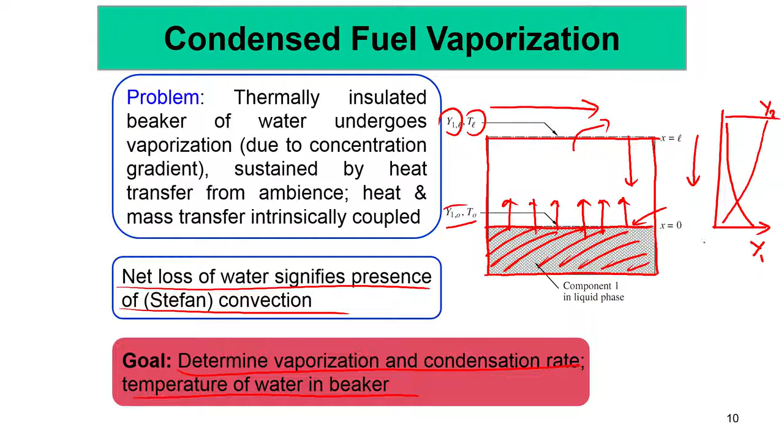Now, we can also apply species conservation, where i equal to 1 can be the water vapor phase, and i equal to 2 can be the air phase. Of course, there is also air here, because if the species profile of Y1 is going down like this, there has to be air, Y2, going the other way, because the sum of Y1 plus Y2 must always be equal to 1.

Okay, so for that, if you consider the species conservation, this is F times dYi/dx minus d/dx of rho D dYi/dx, equal to 0. Of course, F is equal to rho u, because the actual formula is like this: rho u dYi/dx minus d/dx of rho D times dYi/dx equal to 0. So that is the thing.

So instead of rho u we have put F, because that is a constant, and then if we integrate it once, we get this thing: F Yi minus rho D dYi/dx is equal to a constant, and that is equal to Fi. Why Fi? Now that is an interesting thing. For that you have to understand what these two things are, that is why I have written this.

So we have to look into this guy, that is F Yi minus rho D dYi/dx. What is this thing? We can write this F as rho u times Yi minus rho D dYi/dx. Now this guy, rho u Yi, rho times Yi I can write as rho i times u, minus we can write this as Yi by Yi times rho D dYi/dx.

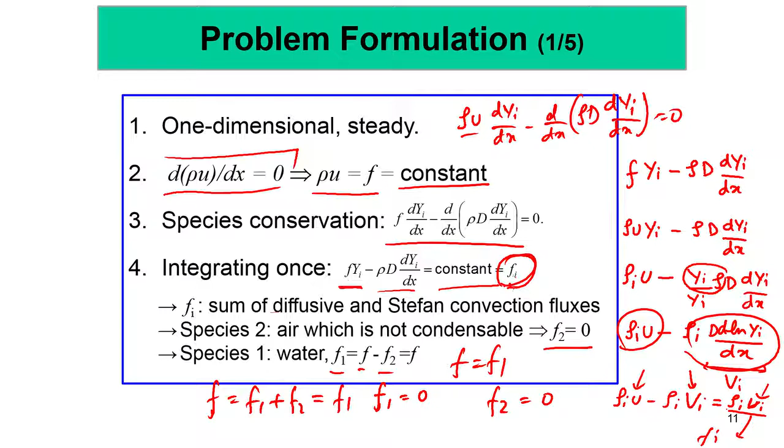So we can replace this F1 with F. Then we get F Y1 minus rho D dY1/dx equal to F1, which is F, so we get essentially F times (Y1 minus 1). We can write this equation as F dx equal to rho D dY1 over (Y1 minus 1), and then we can integrate this.

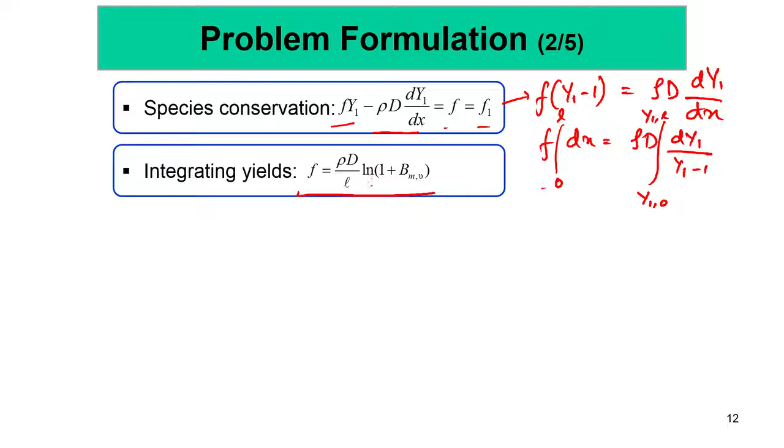We integrate between 0 to L, and Y1 from Y1,0 to Y1,L, and we get F equal to rho D over L times log of 1 plus B_M, where B_M is the mass transfer number, which is this quantity. This mass transfer number is essentially the difference between the species mass fractions at the boundaries, that is Y1,0 and Y1,L.

So, this is the difference between this divided by 1 minus y10. Okay. So, you see that this net mass flux has a logarithmic dependence on this mass transfer number, BMV, which is given by y10 minus y1L divided by 1 minus y10. And of course, you have vaporization when this is positive and condensation when this is negative. And when it is negative, y1L should be greater than y10.

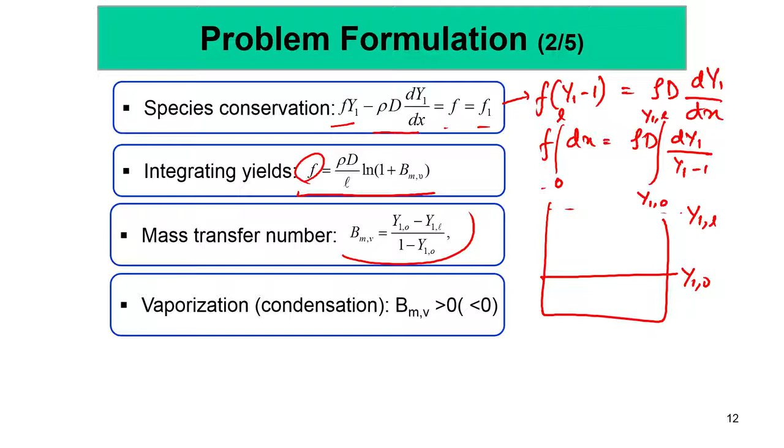So, if the ambient mass fraction of species 1 is greater than the mass fraction of vapor just above the interface, then you have condensation. Okay. And if it is slow vaporization, if BMV is much less than 1, you can approximate the logarithm to be linear and you get rho D by L times BMV. But when this becomes large, you have a logarithmic dependence which tells you that f essentially slows down with increase in BMV and is not directly proportional to BMV. The proportionality only holds when this is very small.

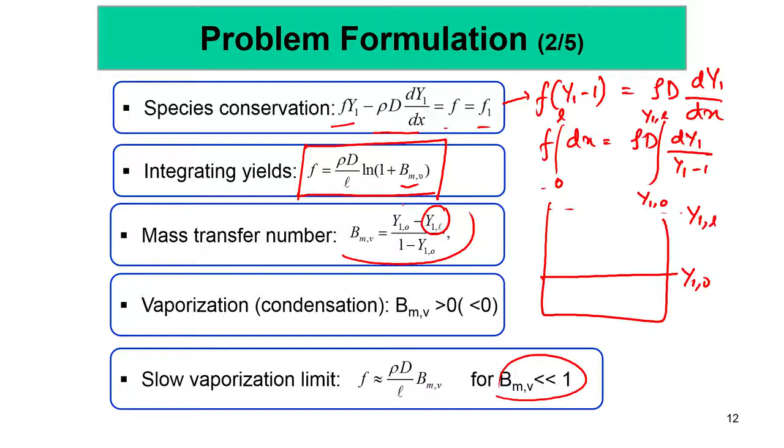Okay. Now, you might think that the problem is solved, but it is not, because in this vaporization mass flux f, we do not know BMV, because we do not know what is our y10 essentially. So, the problem is incomplete, because with only species conservation, the vapor concentration at the surface, that is y10, is not known.

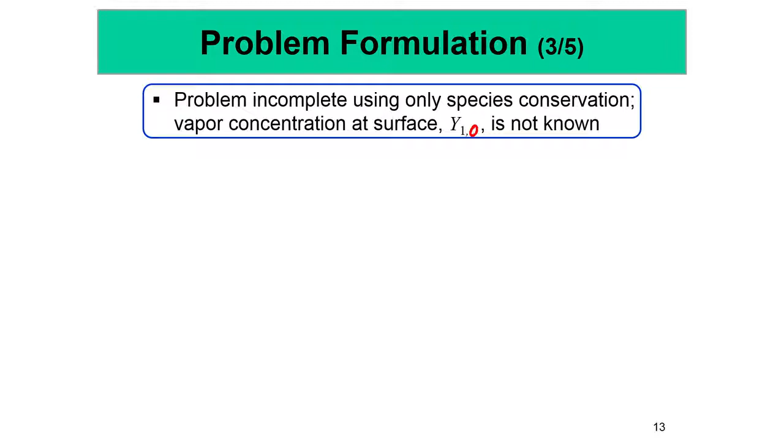So, to know y10, we need the energy conservation, which is nothing but rho u Cp dT/dx minus d/dx of lambda dT/dx. You do not have a right hand side in either the species conservation equation or this one, because there is no reaction. If you integrate this, you get f Cp T minus lambda dT/dx equal to constant. Then you have to apply energy conservation at the interface, saying that the energy for evaporation is supplied purely by conduction.

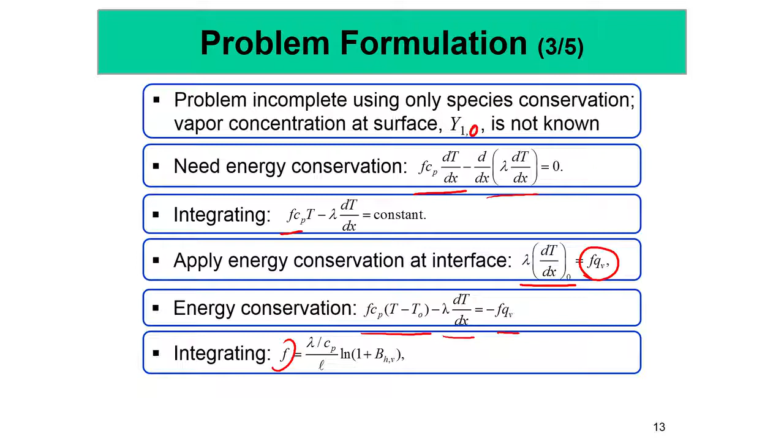As a result, lambda dT/dx at 0 is the evaporating mass flux times the latent heat of vaporization, QV. Using that, we get f Cp (T minus T0) minus lambda dT/dx equal to minus f QV. Then if we integrate, we find that f is equal to lambda by Cp times 1 by L, the distance between the outside and the surface, times ln of 1 plus BHV, where BHV is the heat transfer number, Cp (TL minus T0) by QV.

This once again shows exactly similar things, because previously we got f equal to rho D by L times ln of 1 plus BMV. Okay. So these have a very similar form because the nature of the equations is similar. Here lambda by Cp is the characteristic diffusivity for heat transfer, and rho D is the characteristic diffusivity for mass transfer. We can assume Lewis number to be 1 so these two are the same, but this is not required now.

Okay. So, this heat transfer number is BHV equal to Cp times TL minus T0 by QV. Both the heat transfer number and the mass transfer number can be thought of as the driving potential that drives the species flux or the heat transfer. So, the larger this BMV, the more is the mass flux F, the more is the evaporation. This F is essentially the mass flux of water, because there is no mass flux of air convecting. So, it is essentially the evaporation flux.

So, this evaporation flux is larger for larger B, either BM or BHV, that is the mass transfer number or the heat transfer number. So, this acts essentially as a potential, and this potential depends on the difference between the free stream and the surface, in terms of the temperature difference or in terms of the mass fraction difference. Okay. So, larger the mass fraction difference, larger is the evaporation rate; larger the temperature difference, larger is the evaporation rate.

Okay. Then if we say that the Lewis number is equal to 1, then you see that these two become the same, and these two F are the same, and both represent the mass flux of water vapor that is escaping the interface. Then the logs can be equated, and for this to be equated, the mass transfer number and the heat transfer number have to be the same.

We get this relation for the heat transfer number and mass transfer number being the same, and using this relation you can essentially solve for y10, which was holding us back from describing F, because F contained the mass transfer number, and the mass transfer number contained y10. So, y10 is essentially a function of T0, and that is equal to y1L plus BHV divided by 1 plus BHV, and this is still not solved.

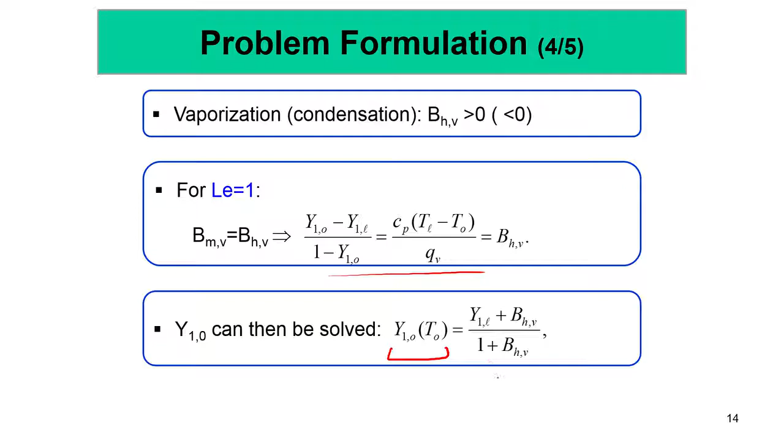It is still not solved because T0, that is the temperature at the surface, is not known, and for that we need phase change kinetics. Okay. And for that we have to assume the equilibrium state, where we assume that the same species goes from a liquid phase to a gas phase, and the phase change rate is assumed to be much faster than the gas phase diffusion rate.

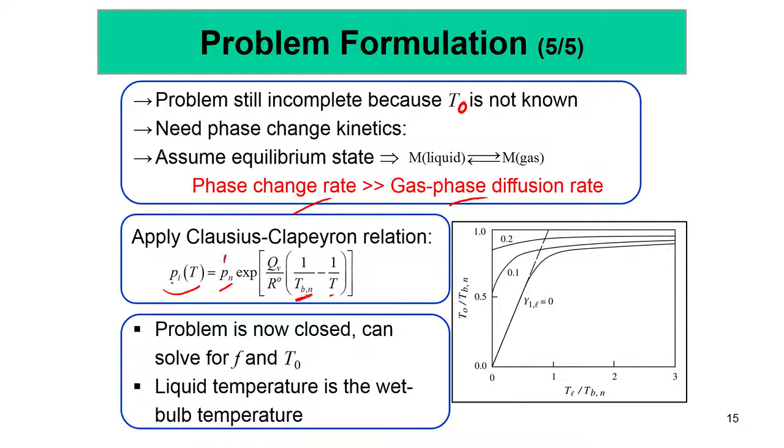Okay, and then we can apply this thermodynamic relation, called the Clausius-Clapeyron relation, which says that the partial pressure at temperature T is essentially equal to the reference pressure, which can be assumed to be 1, times e to the power of QV, that is the latent heat of vaporization, divided by R0, times 1 by TB minus 1 by T. This can be a reference temperature, and this gives the relation between Pi and T, that is partial pressure and temperature when there is a phase change, and if this is 1 bar, this essentially becomes the normal boiling point.

Okay. And then you can convert this partial pressure into mole fraction, and from mole fraction you can get to mass fraction. So, using these two relations simultaneously, one can iteratively solve and find F and T0 together, and the liquid temperature so found is the wet bulb temperature. So, this essentially solves our problem of estimating the evaporation flux from a liquid pool, at the top of which there is continuous removal of the vapor flux coming out of the liquid pool.

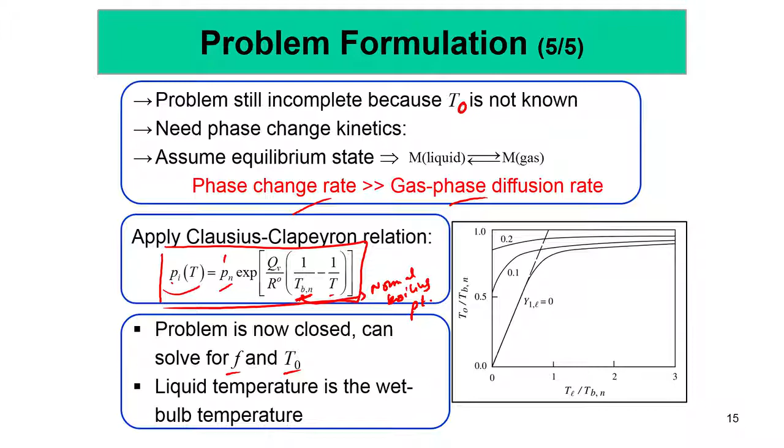So this is very important, and we are now in a position to tackle the more practical problem of droplet evaporation, where the droplet can contain water or a liquid fuel, and for the liquid fuel case we can use this further to find out how the droplet burns. What we'll do is use these ideas that we have just developed to describe the droplet evaporation rate,

and then once we have the droplet evaporation rate, we can use the previous non-premixed flame coupling function ideas, and we will couple these two things, the evaporation analysis and the non-premixed flame coupling function analysis, and using these two we can describe droplet combustion. That we will be doing in the next class: droplet vaporization, and the d square law of droplet vaporization. So thank you very much.